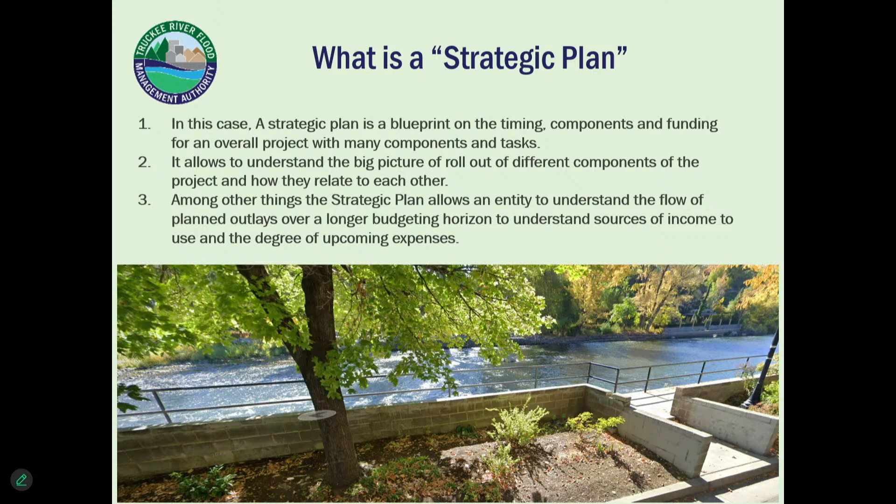Next slide, please. Okay, so why a strategic plan -- I just got ahead of myself and explained that, so I won't repeat it. This whole slideshow will be available on the internet, and I'll email it to you guys next week. Next slide, please, I already explained this.

Okay, so the components. One thing is you want to have a functional description of the project -- what are all the elements of the project and how they interrelate with each other. You also want a real good description of the cost of the project.

And what's interesting is as we do Rock McCarran and initiate these other designs, we'll get a lot better information on costs. Before, there's been all kinds of cost estimates out there. I've done a lot of designs where I've done engineering estimates myself, but it's much better to lay it all out and have an engineering firm say, yeah, this is what I think the cost is, versus me doing a unit analysis and guessing, so to speak.

So the third thing is the effects of the project, positive and negative, and how they are mitigated if negative -- it needs a section on that. It also needs a timeline and sequencing of the project along with the financing and logistical concerns.

Like, for instance, we always talk about with Vista -- I'm just going to ask, what is the critical path of Vista Narrows? Let's see if you guys know. Exactly, the permit is critical path. We have now the financing. Yeah, Alexis studied last night.

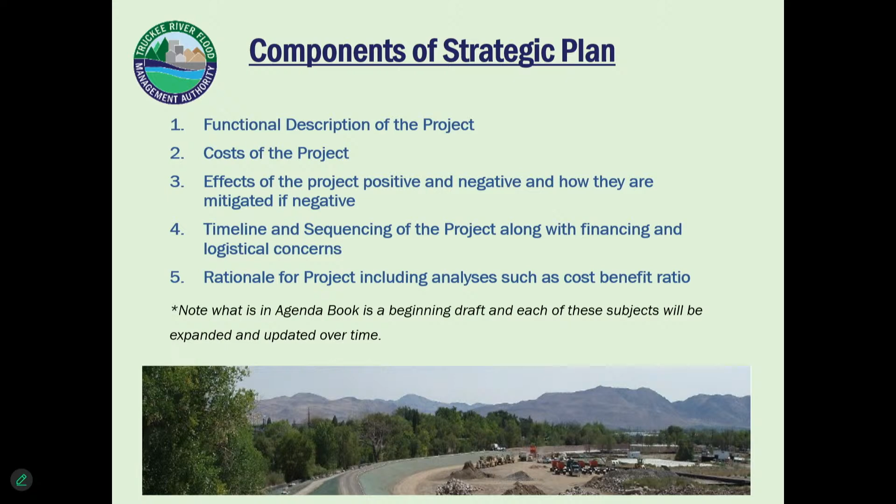That is a small project up near Lake Street, because there's some nuisance flooding that comes off there and gets down to the airport. It goes through all kinds of neighborhoods - not really bad flooding, but a nuisance flooding issue. At the airport it could actually do a little bit of damage. Then there's another project where we're causing a water level rise on the university lands. But if we put a small levee, or berm, downstream of McCarran Bridge for about 700 feet or so, we don't have that water level rise. So those two things are probably going to have to be added. They're not big, but they probably need to be added. As we get better modeling, better information, better terrain, we're going to see things we didn't see before - those are two of those. Next slide, please.

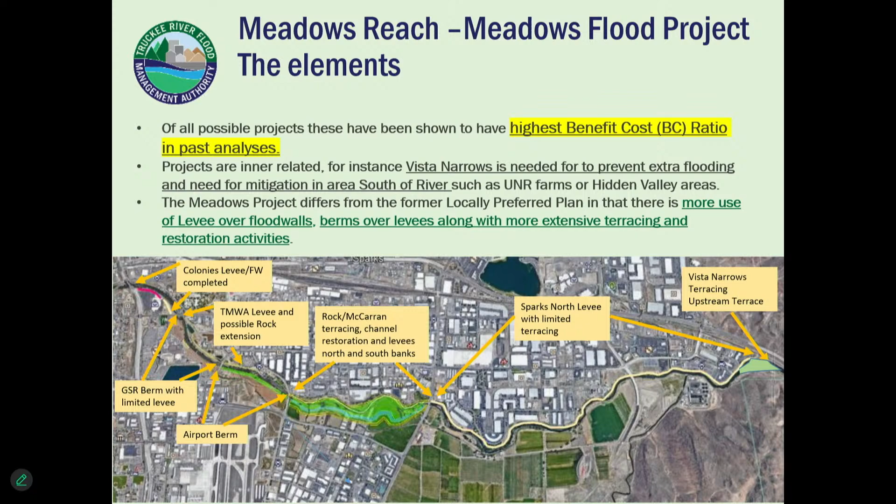Yes, sorry, George - where on Lake Street? Right at the river on the south bank, it appears water's coming into Lake Street, then it flows through that neighborhood, then it goes all the way down, crosses over at Vassar and gets into the airport area. So for such a little break, it really causes a mess. It probably wouldn't take much to fix - like a rolling hump or a low berm or something - but I don't have a design for that yet, and it's not on that map. No, it's not, and neither is the thing with the university - that's not on the map either.

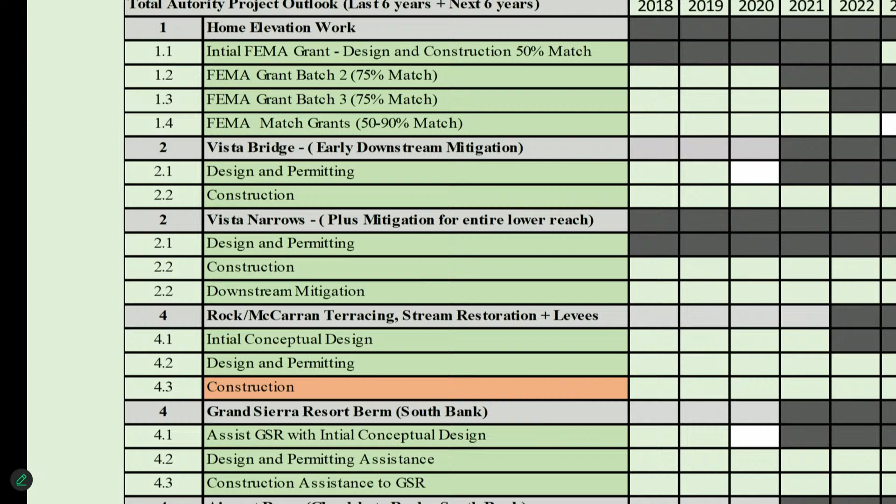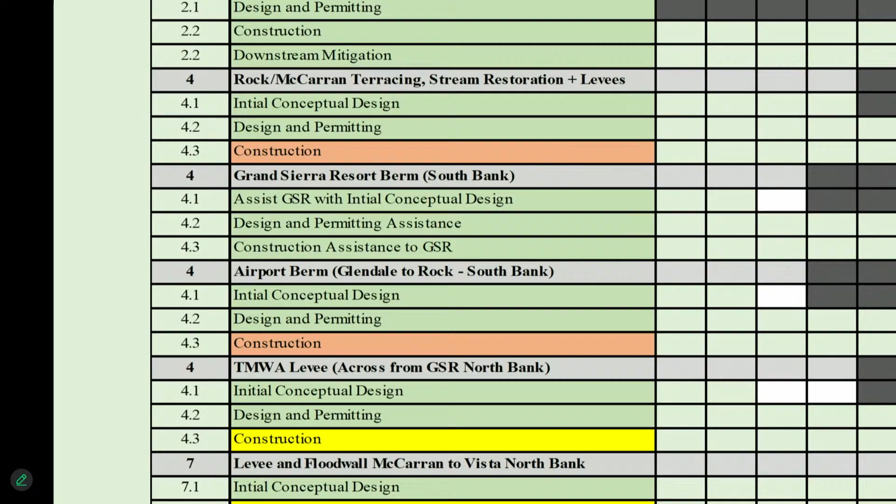So this thing, I know you can't read it - there's a copy of this slide in the slideshow being put up. But what I want to say about this slide is it's really important because it can give somebody overseeing someone like me an idea of where things really are at. If you go through there, you see the green - when something's in green, there's a footnote down there, meaning we have funding to do this right now. Like with our home elevation work, we've been doing this for a while, 6 years before and 6 years after, from 2018 to 2030. We've been doing this for a while and we do have funding for it. We'll likely only do 1 or 2 more homes at most, because there's just not a lot of interest in it. But then you look at all the things in green - those are things we can do with existing funding. With yellow, those are things we probably will have to, or might be able to get there with our income stream by the time it comes up. And the things in orange are things we will have to do some sort of financing or a grant for.

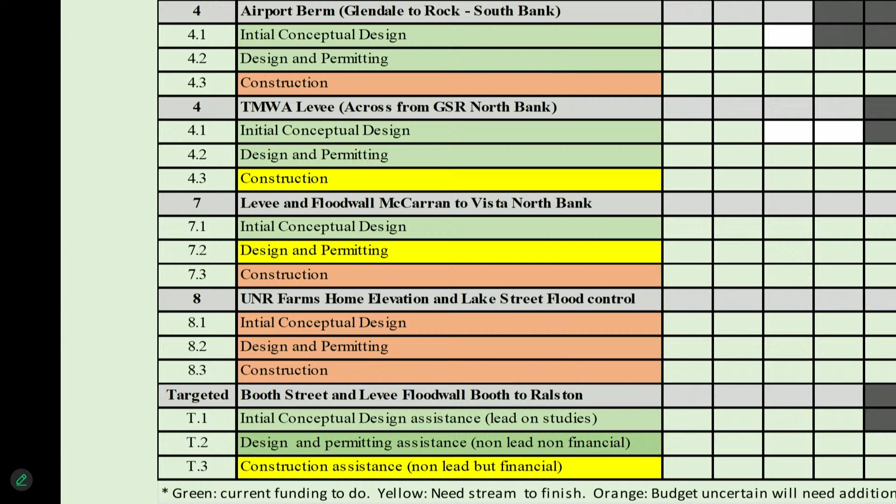Along those lines, one of the holes I saw as I was doing the plan is I really need to lay out our financing. I had a meeting with the head of a loan program that was just shifted to the Corps from EPA for levees. They are loaning out over billions of dollars to different entities, about 200 million at a time. The minimum is 20 million, and it's for things just like what this is.

We were talking, and he was really excited to hear that I was being deauthorized in a few weeks. At that time, it was at the end of October. So about a 20 to 30-minute talk, but the bottom line is, over bonding on $100 million, according to the averages, you save about $25 million with this program. So it's significantly different than bonding.

We're working on that, and as we get more information, we'll have a dedicated financing section that talks about both that loan program and grants. One of the other cool things about that loan program, and I do have a presentation in the announcements about when I talked to him after the presentation, is it is like... how many of you guys actually have a home equity loan on your house?

Anybody ever do that? Yeah. Well, a home equity loan is like, you can borrow the money and you don't pay interest on that money until you draw it. This loan program is the same way. You do not pay interest on it until you borrow it. There's a period where you're just drawing on the money and paying interest, and then they have a period where you pay it back. So it has up to a 30-year payback period, and you could have up to a 5 to 10-year draw period. That allows you to build the project and then put it into your budget for payback.

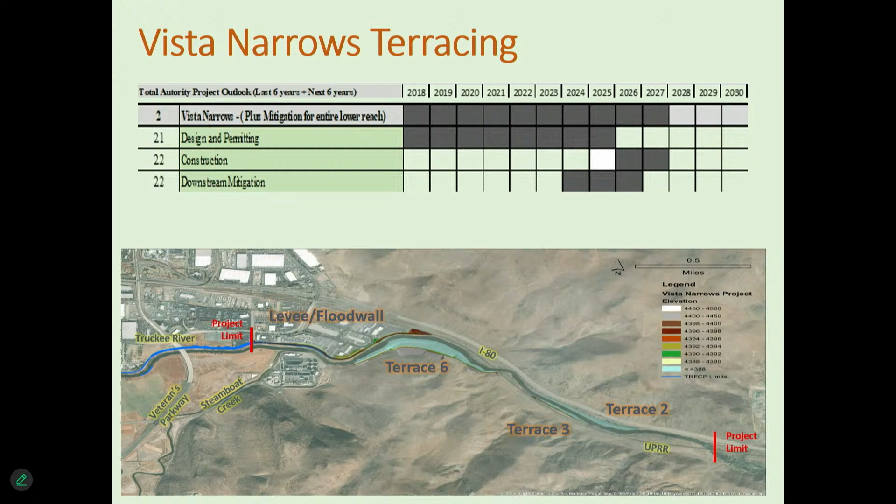Next slide, please. So the next thing, it's moved up now, is Vista Narrows. And that's part of this. When you have more information and modeling, you find out that if you cut off all those breakouts up by the airport and up by GSR, it's going to make a gigantic mess if you have all that extra water in the river and you don't have protection down there. So it needs to be done either concurrently or before, or very soon, maybe just right on the tails or something like that.

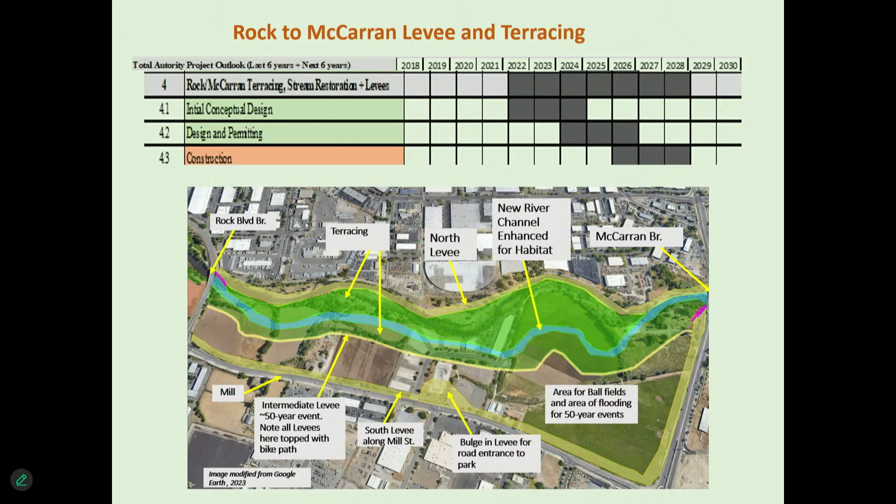So the idea is this is moving up. I have it starting as early as 2026. The 60% design should be done at the end of 2025. We're hoping to get a community grant for around $3.5 to $4 million. When we get that, we'll work on property acquisition. When we have that all in place, maybe as early as late 2026, we could do it. It'll probably be more like '27, but that helps us because now we're not behind these other projects like GSR, TMWA, and the airport. Next slide, please.

So the GSR berm with the TMWA levee. The GSR is an interesting subject, and we are... whatever to talk about them, right? Yes, okay, in general terms.

We are working very closely with the GSR, but their plans are shifting and changing themselves. So we are trying to work with them, with their plans, however they're going to do it. And it probably won't look like what's up on that picture right now. But whatever it is, it's going to provide flood protection up to a 117-year event with 3 feet of freeboard, just like the rest of the project. It's beyond a 100-year event because, frankly, a 100-year event in 10 years may not be a 100-year event anymore. It might be a 50-year event, and we need a higher level of protection than what we have.

So anyways, we're going a little bit bigger, and even the Walmart area there with the Colonies levee is designed 117 plus 3 feet, so that was good on them. We're going to match that level of protection. So this one, if you look at it, we're trying to get everything done by 2027 now.

We've already been talking to GSR multiple times. I've talked to TMWA. We've been out there once with them, and I've been out there with consultants about 4 times. So we're ready to put that into design. Probably our next meeting, I might even ask you to put this into design. So as we build those out, those will have the protection there for GSR and a major protection to the airport. Next slide, please.

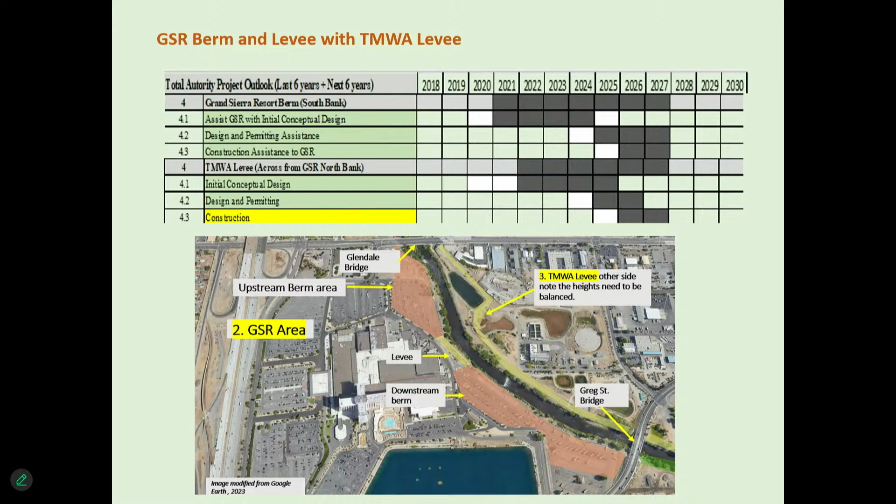So airport berm and terracing, this one, as you can see, we have been working on. One of them got cut off there, I'm sorry. I don't have the construction on there, but once again, the construction would be '26, '27. We've had 2 meetings with the airport, and we're moving, and these are in the last 6 to 8 months, so this isn't like over years. So we're meeting with them.

They want to meet with us more, and we are working forward on a design with them, and we're integrating them into the design team so they would help choose this contractor. They would look at all the different interim reports and make sure they're okay with it. So we're integrating them into it like we did with the tribe, like we've done with other entities. We're doing that with GSR, we're doing that with TMWA. Same thing.

So anyways, once again, we're looking at construction done by '27 on that. I'm sorry, I left that line out there.

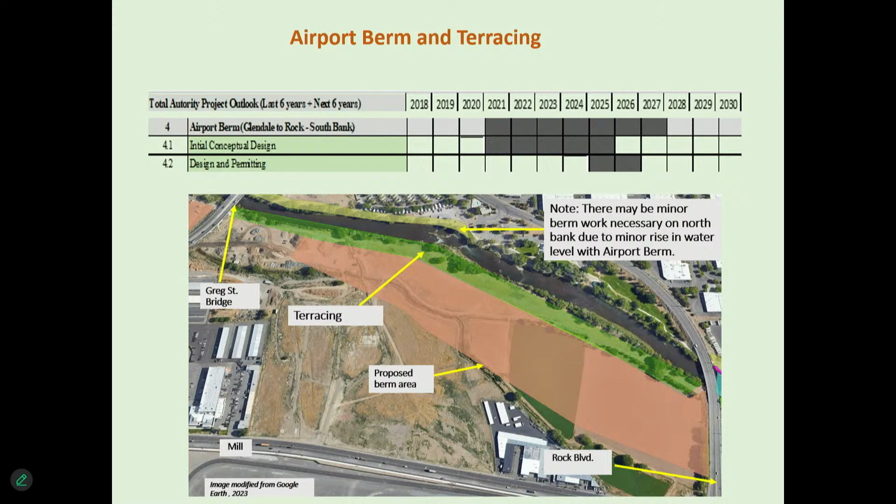Next slide, please. So this one is the North Bank levee, and this one is being moved up considerably. And I'd like to move it up more if I can. Right now I've got this in, and I should have put a blank in there for 2025. I would like to get into design and permitting, start our design this coming year. And what I'd like to do there is an alternative study to figure out how to place that and keep it as levee the whole way.

I've heard a lot from Sparks, both electeds and staff, that they want that to be a levee, not a flood wall. So we're going to work on trying different alternatives to get there and really study that out. Also, we want to look at whether we should break this thing up into 3 pieces instead of just one, and do it sooner, like the really bad spot where the breakout is, to protect the area more sooner.

So we'll be looking at that, and that's something we'll probably be bringing to you next year. I'm estimating we're going to bring all designs to you next year at some point. So, next slide.

Okay, so these are other things that we're doing that are related, or new things. Home elevation is still going on, and that will probably set to end at the end of 2026. We do have 2 active FEMA grants going right now, but we're just not getting a lot of interest. There is one homeowner we're working with off and on, so we'll see how that goes over the next 6 months or so. But anyways, we are working on it, though it seems there isn't a lot of interest in the program.

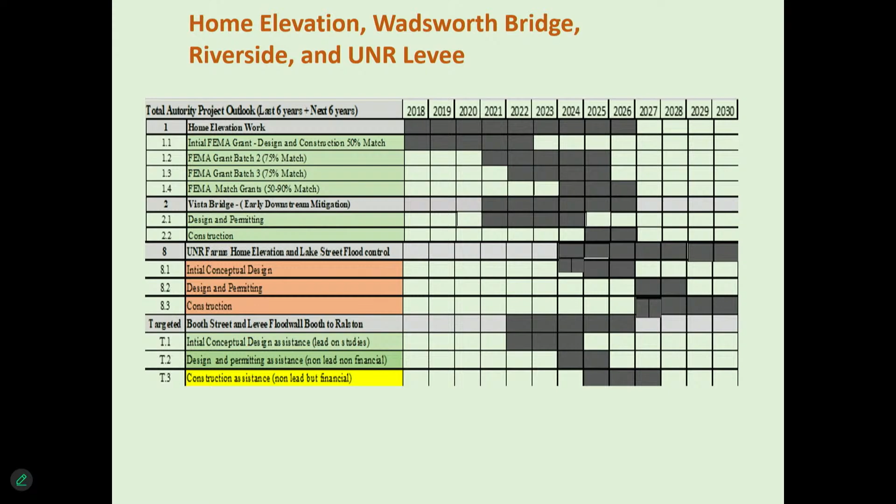So next thing is the cost of this has gone up, not surprising I suppose. You can look at all the different areas, but I've got Rock Boulevard to McCarran up to 59 million—some of my consultants scared me into making it higher than it used to be. The levee and flood wall at McCarran, I've put some more inflation and contingency on it, so it's up to 52.8. Vista Narrows, with more inflation on it, is at 51.5.

Some of those costs have already been realized, so this isn't just a theoretical cost forward. Like I said, I need to do a very careful analysis, a very careful financial section, but as of right now this is our cost forward, and it's about 20 million higher than the analysis I did last December.

So you see there, I was at minus 53 million. Now I'm at minus 73 million. That's something we can finance with that loan program if the interest rate isn't crazy—if it's around 4.5 to 5, we can do it; if it's 7 or 8 percent, no. Right now it is in that 4.5 to 5 range, and historically, when it was run by the EPA, it was even lower. So we have the ability right now to finance this and get it done in a very short amount of time.

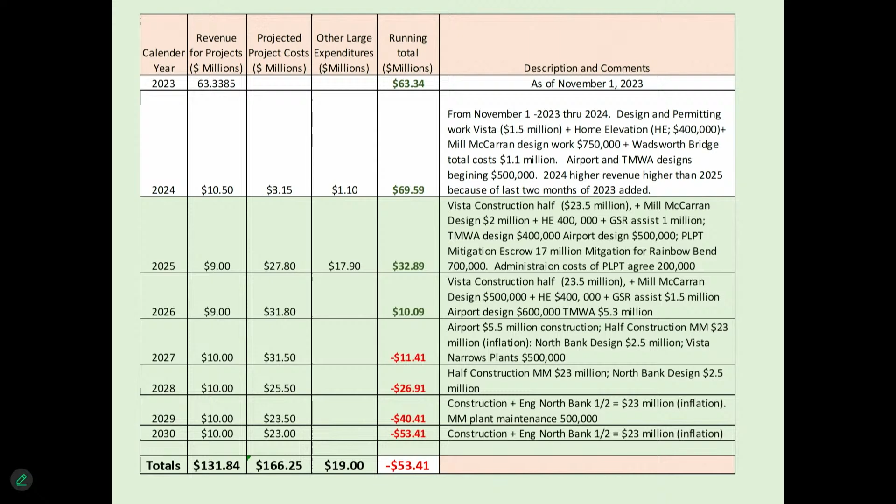Instead of having to string it out to get the funding each year. So, next slide please. The takeaways I got out of doing this exercise is that I need to update information on the cost and benefit.

Because I was just talking to Mayor Lawson, and we were talking about how I need to sell the problem. This is a $2.5 billion economic juggernaut staring us in the face that will crush us—not completely, but will really hurt us badly, on the order of COVID. I'm not saying as bad as COVID, but it's on the same order of magnitude if it happens. Like the '97 flood, if it happened today, it would really hurt us on tax base, damages, and people losing their jobs.

And these people who lose their jobs working in the industrial areas live all over the Truckee Meadows—a lot of them live in the North Valley. So people in the North Valley say, well, what does this have to do with me? Well, guess what, a lot of your people work in those areas and they'll be unemployed thanks to the flood. So I need to sell this, and I'm going to show a video here in a minute that helps do that, as well as other things.

And that's something you guys have been criticizing me about, by the way. And it's a valid criticism because I need to sell it. No, it's a constructive criticism. I take it as that, and that's okay.

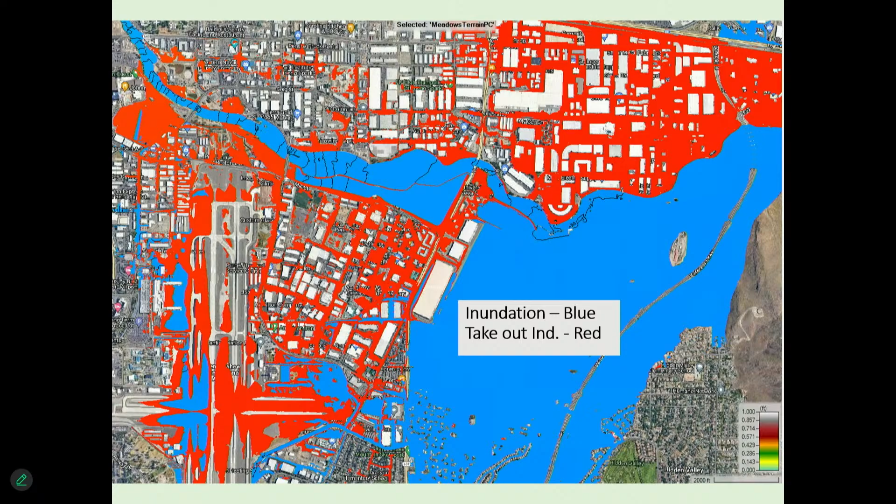Thank you, Mr. Chairman. Have we talked to our lobbyist about the new administration and realistically looking at what funding will look like, especially on the granting side?

I don't think that those will exist. And I'm just having a discussion about what that federal picture looks like for us. I just feel like this loan program looks robust. It doesn't necessarily look like it will go away. I just have some concern about looking into the future about funding for us.

Yeah, I think it will be more challenging for grants, but I think it might even be more liberal on the loan programs. And we have talked to him about it. And he even gave us a sheet on kind of thumbs up, thumbs down on different aspects of what we do based on if there was a sweep versus a divided government versus a Democratic sweep or Democratic divided government — this was actually before the election, and it had all scenarios.

So we have talked about this already, and we continue to talk about it. And we're going to be looking early and fast on the grants because some of this is leftover funding from the infrastructure bill. Yeah, okay, great.

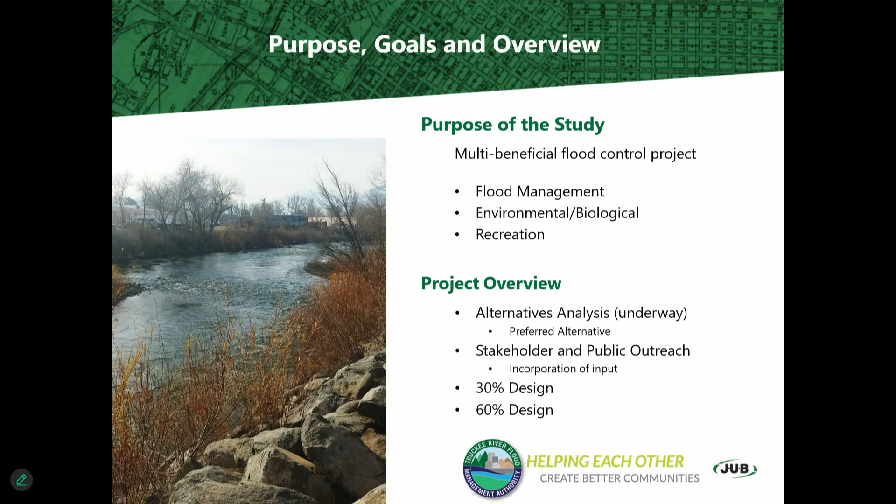TRFMA selects. All right, so the methodology on this - for all the alternatives we studied, the only ones we've put forward here all contain the 117-year flood. That is the flood that comes through the Colonies project right above the Rock McCarran project. So all alternatives do that.

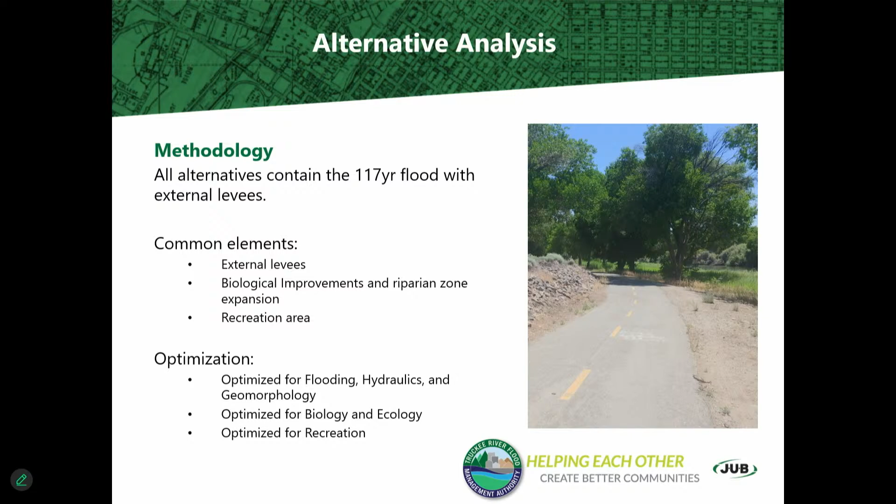Common elements in all the alternatives you're going to see today: they all have external levees, they all have biological improvements and riparian zone expansion, and they all have a recreation area. The way we optimized this, we essentially optimized first for flooding, hydraulics, and geomorphology. Once we got the flooding under control, then we'd go in and optimize for biology and ecology, and then recreation.

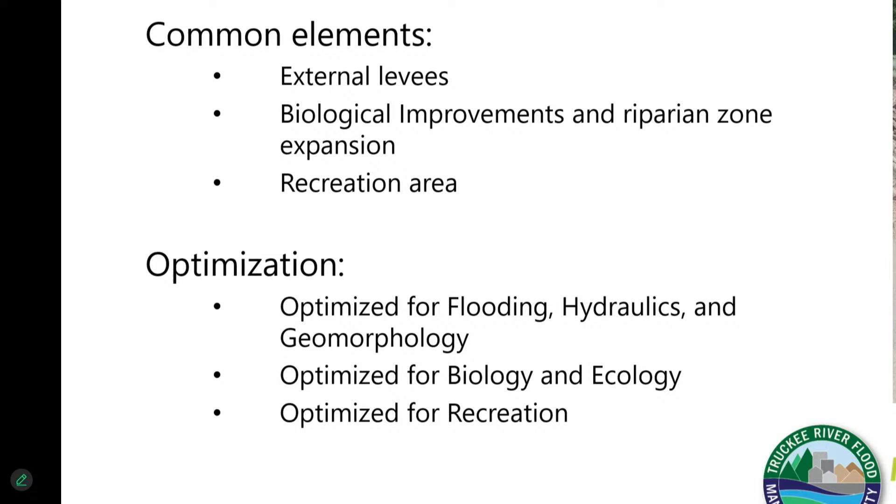Okay, so alternative considerations - we had a ton of things to look at, so many things. I'm not going to read the whole list, but the hydraulic considerations, geomorphology was a big deal, geotechnical, ecology and biology, permitting and land ownership, and recreation. All these subcategories are how we're ranking each of these alternatives. We're looking at each of these things for each alternative as we go through, and we're actually ranking them.

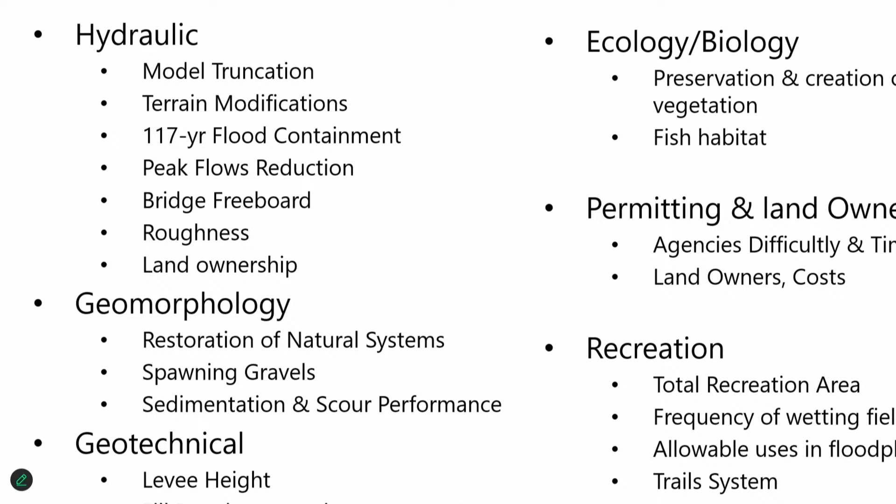What we're putting forward this month is a ranking matrix that's kind of like, okay, here's what we found, George - how do you want to weight this, and what do you think? We're going to work with TRFMA on the selection of the preferred alternative.

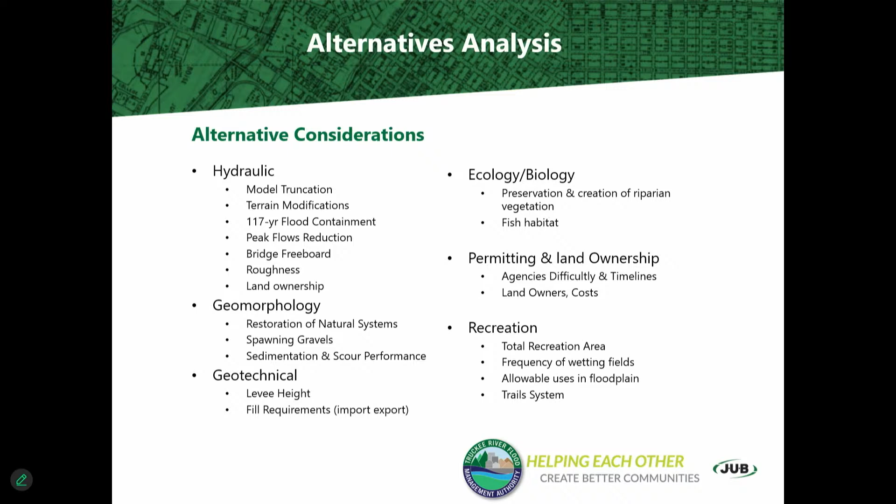Okay, so here's the proposed alternatives. Essentially there's a no action alternative, which is required under NEPA. Then we've got the no river alignment change with terracing - so that's really no change to the river alignment, but terracing. And then two river realignments.

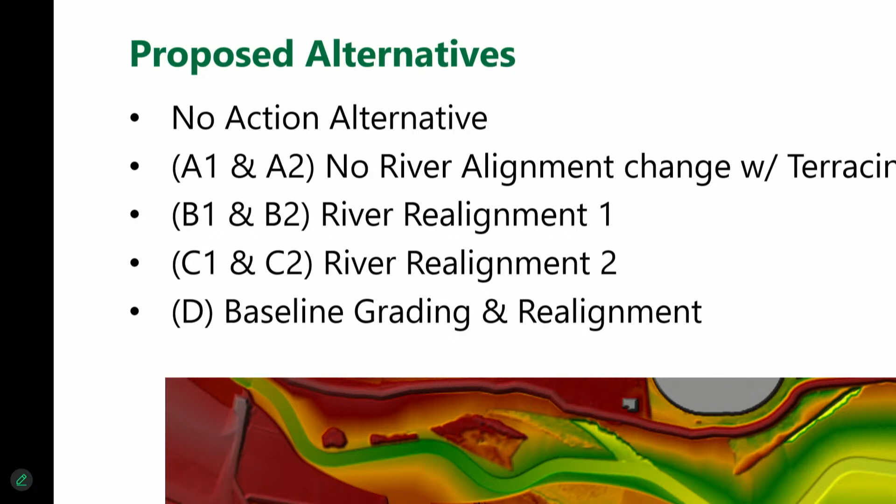And then D is a baseline grading realignment, which was kind of the proof of concept that TRFMA had done - it proved that we could do it, that George had done prior to us coming in. So that's also one of the alternatives we moved forward to compare.

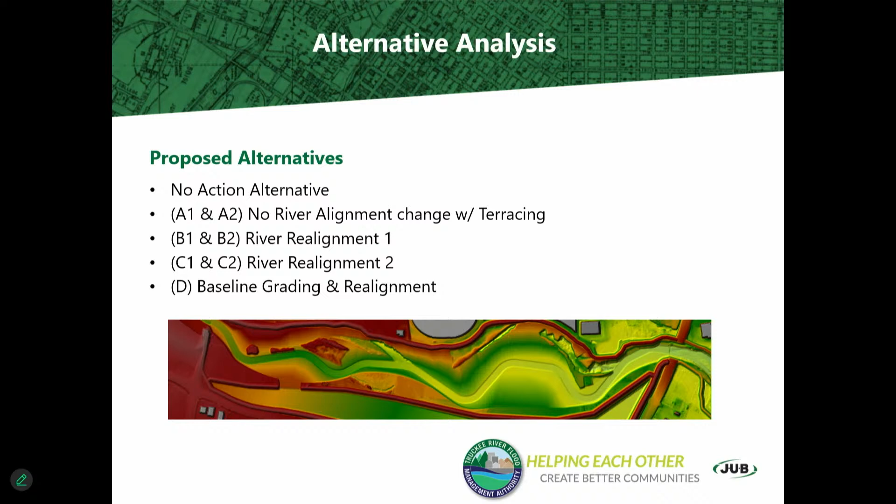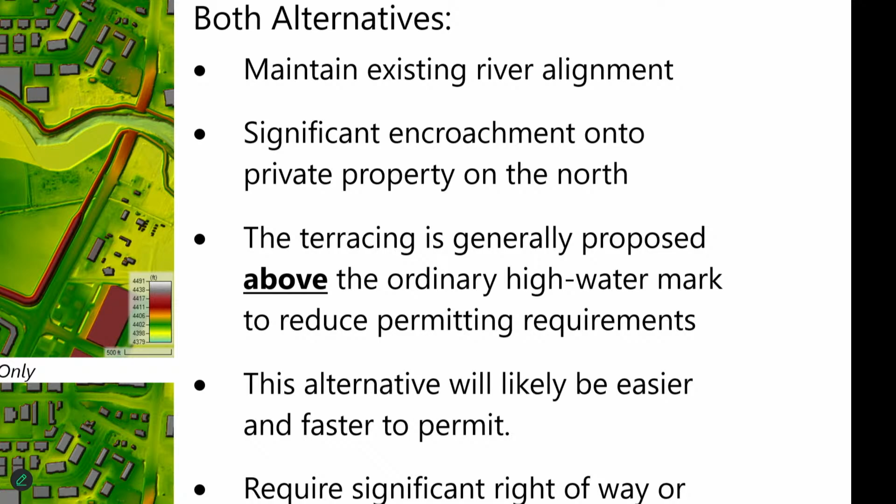All right, so here is the no river change alternative. Essentially this maintains the existing river alignment. There's significant encroachment onto private property on the north end of it. The terracing is generally above the ordinary high water mark. This alternative is going to be faster to permit, but it's going to require significant right-of-way or land acquisition, and it is not a full restoration of natural processes.

So if you go over to the image on top - I like how you're zooming in, thank you - so you can see the levee. I don't have a pointer. Anybody have a laser pointer?

Well, anyway, you can see that levee along the top on the north end of the river. In this alternative, that's pretty much across private property the whole way, and that's a downfall, a negative on this alternative. You can see all the terracing - essentially we go down to the ordinary high water mark, but not below, and we're grading above where Army Corps would have jurisdiction, so when it floods there's riparian area added, but it also makes it easier to permit on this alternative.

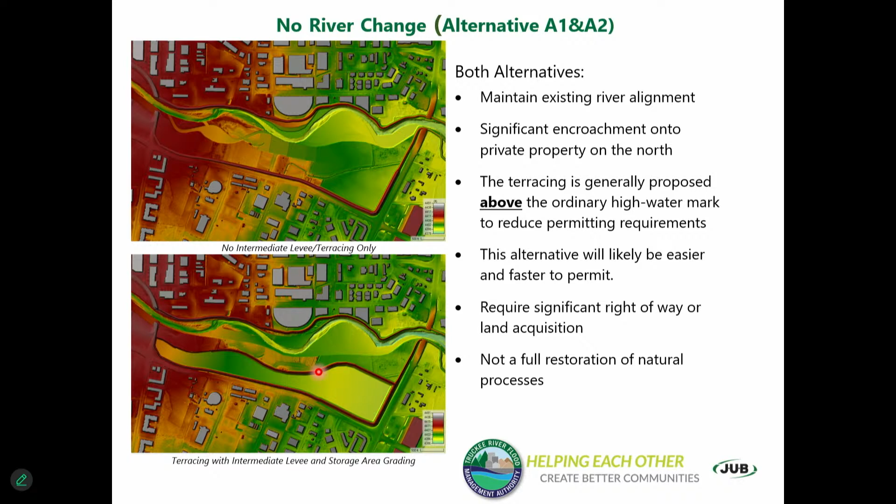And then the top and the bottom are essentially with a levee and without a levee. So if you go to the next slide, I'll talk about the with-levee and without-levee versions. Every alternative, we did one with an intermediate levee.

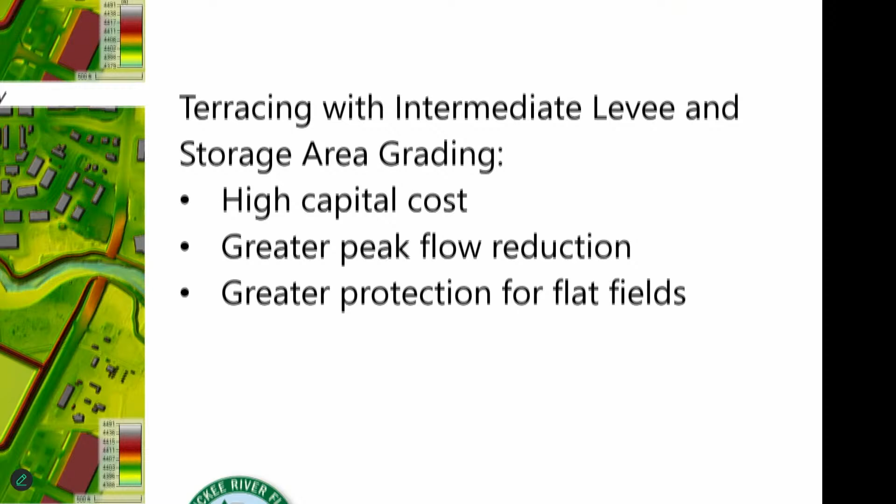So on the bottom, you see that intermediate levee with kind of a storage area, and on the top, it's just not there. We looked at all the alternatives with and without this intermediate levee. Essentially, if you have an intermediate levee, it costs more, but it also adds protection for the flat fields behind that levee.

And it actually reduces the overall peak. So if you have the storage area and the water flows into it with the levee, we take water off the peak. So you pay more, but you get more benefit in protecting the fields and taking water off the peak. There's a cost-benefit ratio that we have to work with there, and we're going to work with TRIFMA on whether the intermediate levee makes sense or not.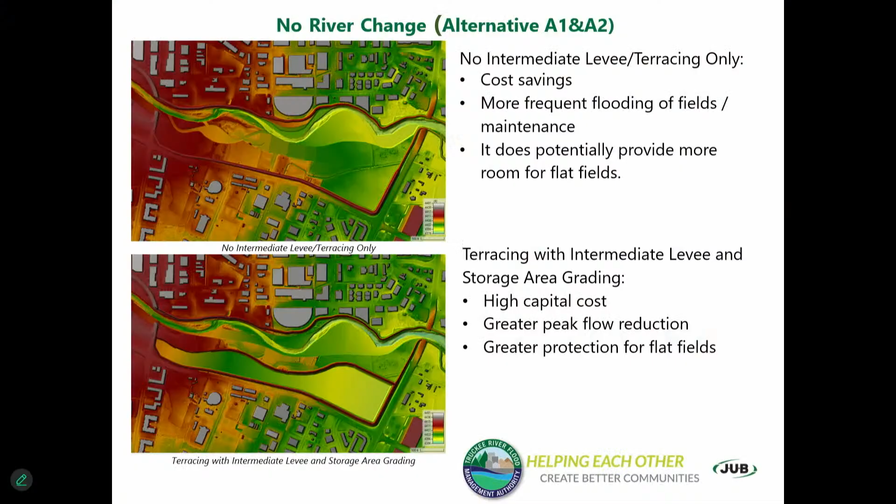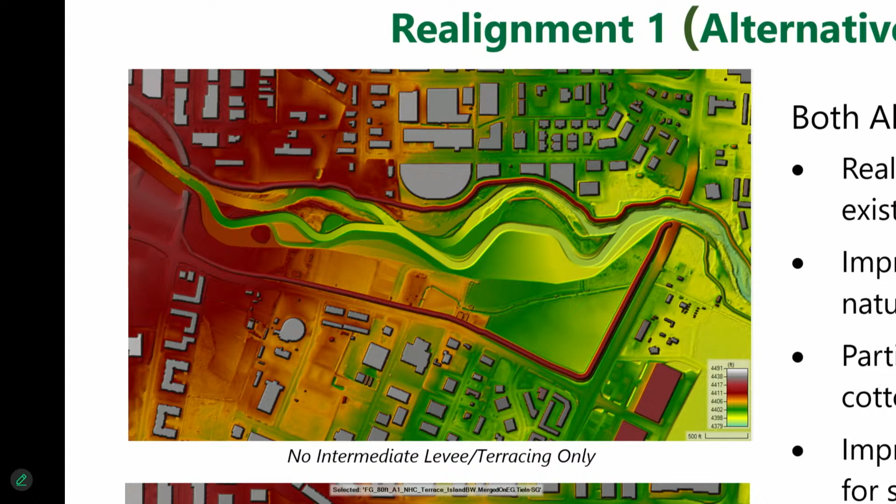All right, next alternative. So that's the no river change. Realignment 1 realigns the river. You can see it utilizes the existing channel. Above, you've got kind of that middle channel, the northern channel utilizes the existing river as part of the sinuosity. It also has backwater channels for habitat and fish. And then we terrace on the south.

And then this is the one with the levee. You can see different complexities here on the terracing that we went through. They can be applied in all sorts of different ways. We just chose a few as we looked at these alternatives. When we get into design, we'll nail those down.

The north levee on this generally does not encroach on private property. We're able to push it out of the private property, and that's a big thing for having to purchase or do right-of-way on the north. It has improved fish habitat. We're able to keep a cottonwood gallery, a very large cottonwood gallery with established trees in this alternative. And essentially the terracing there is low flow - in all these we took into account the flows below the 5-year storms where we're trying to wet the riparian zone on a regular basis so we can actually establish riparian vegetation and have habitat and make a beautiful restored river.

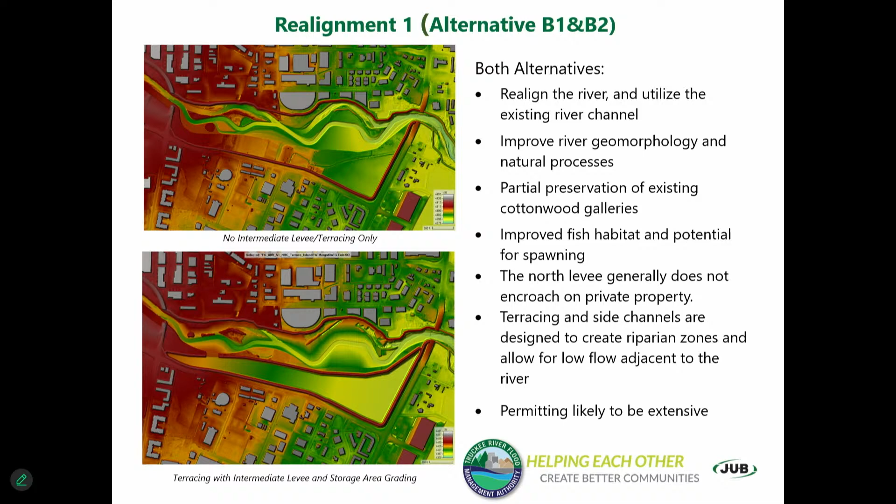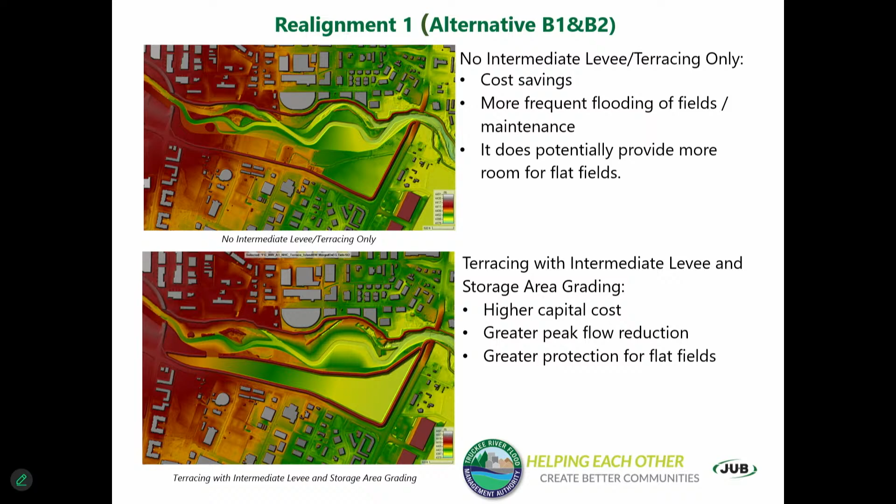Okay, next slide. Same thing with levee, with the intermediate levee, and without - it's the same benefits, same pros and cons. If you've got the levee, it costs more, but there's a little more protection. If you don't have it, it costs less. It's the same thing as the last one, we don't have to go through it, but I did include these slides for each of them. If there's any questions about that, let me know, with or without the levee - more protection, more cost.

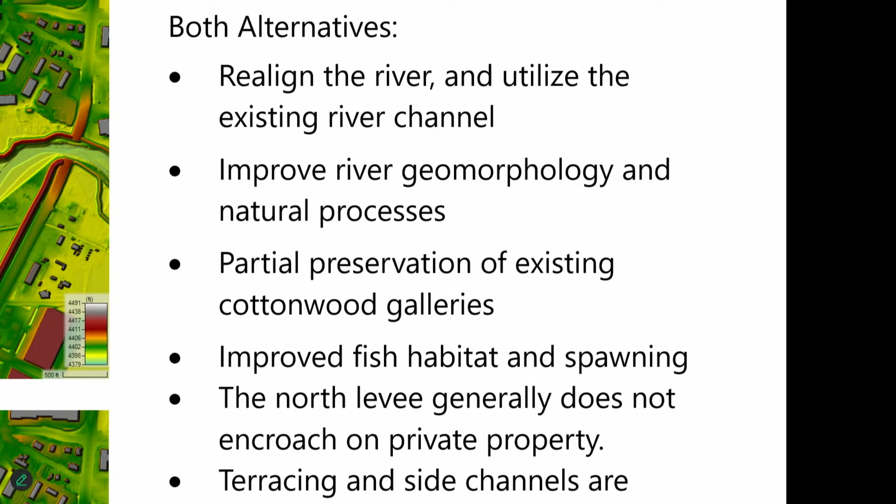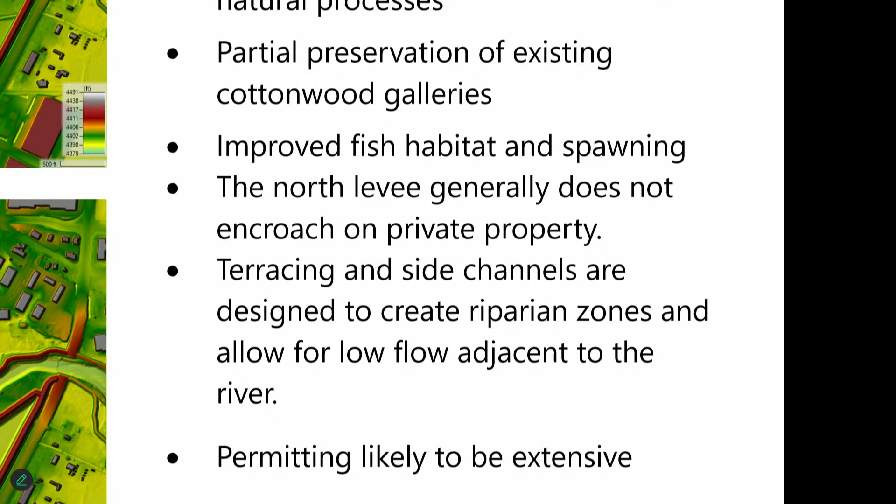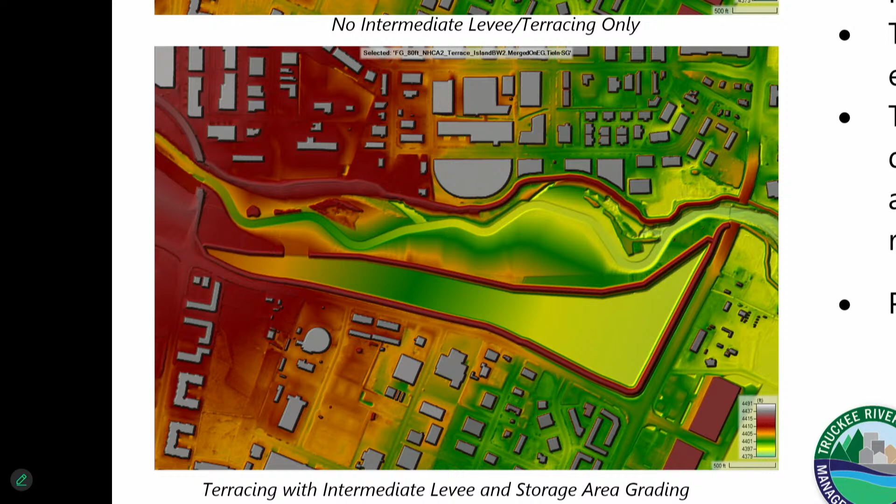All right, Realignment 2. This has very similar benefits to Realignment 1. It is able to utilize the existing river, which reduces overall earthwork. It improves the natural processes of the river. This one is able to preserve a major portion of the cottonwood galleries. It has better fish habitat, spawning, does not encroach on private property - all those same benefits as the other realignment, just a different geomorphology on this one as we look at how the sedimentation is happening and how the river lives and moves inside its corridor.

Maybe just focus in on the top one there for a second, so everyone can get an idea of how that terracing is going to work. As the flooding comes through, it's going to go over the terracing, like on a smaller storm, a 1-year, a 2-year storm. It's going to expand, go outside the banks, and be more of that living river, instead of being kind of an inside single channel. This will be a living river and create a riparian and habitat zone.

Everything to the south of the terracing is the recreation area. Essentially the whole south side we can use. We'll have to have parking and amenities, and the fields themselves.

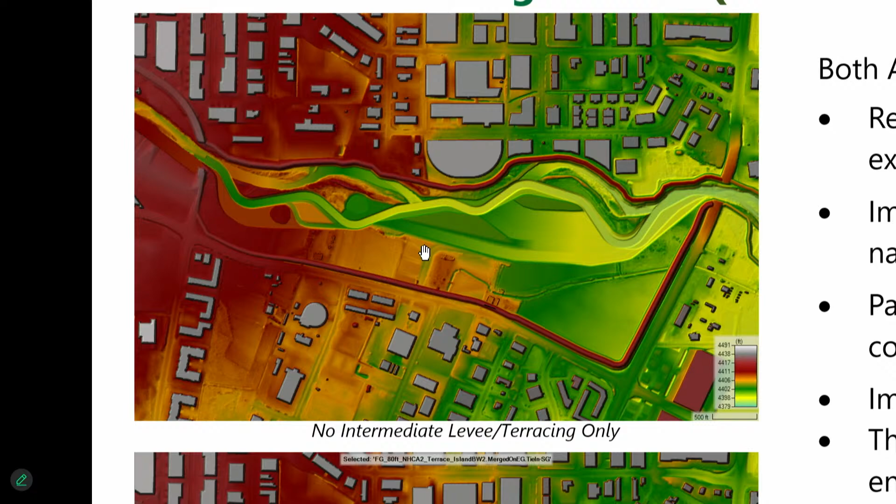So in this alternative, is this where the fish spawning and fish habitat works out? This does, yes. It restores the river in a meaningful way for fish. Mostly for the Lahontan cutthroat? Well, yes, that is the target species, but it'll be good for all fish, improving habitat for all fish.

Just from my standpoint, having a living, breathing ecosystem in an urban environment is pretty cool. So I think that alternative is my favorite by far.

Early on I've had talks with people like Mayor Schieve about this, and if they actually reintroduce the Lahontan cutthroat above Derby Dam, this could literally be the prime spawning zone, and it could actually be a tourist attraction because it'd be so cool.

A dinosaur fish spawning in an urban area? Yeah, and there was even a private donor, I can't disclose who it was, who wanted to fund a bridge to connect the two trails, the intermediate levee trail and the trail on the north levee. This isn't a game changer, but it does create a place where it's extremely rare to have that level of restoration so close to an urban center.

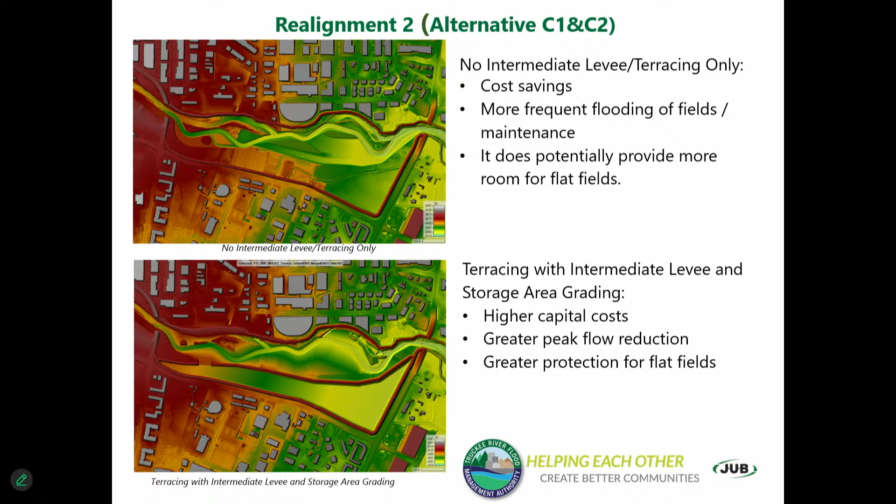And then the last alternative: this is the baseline grading. As I alluded to, this was the original modeling effort, a little different, more of a broad brush, but it gave us the baseline for comparison, not going over 2,400 CFS at Vista Narrows to not violate the agreement. That was our baseline comparison.

We did take it and optimize it a little, moving the levees off private property, optimizing the weir for storage and some other things. This will be put forward as an alternative just for comparison's sake.

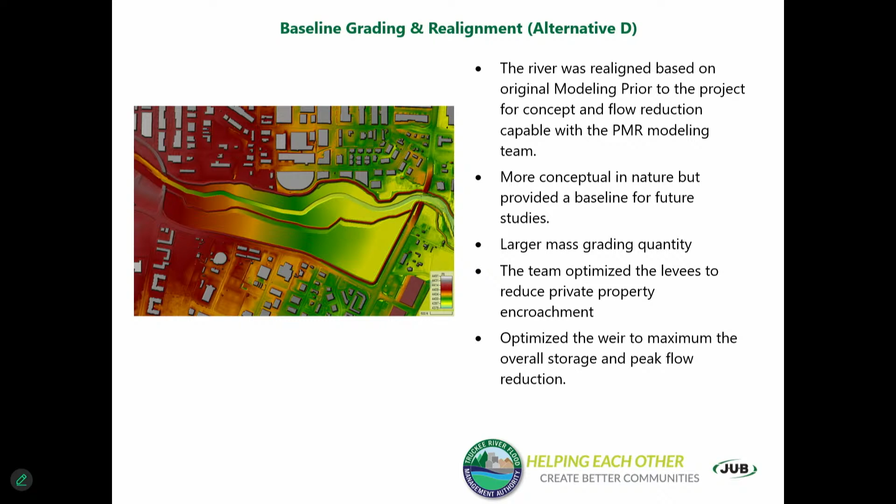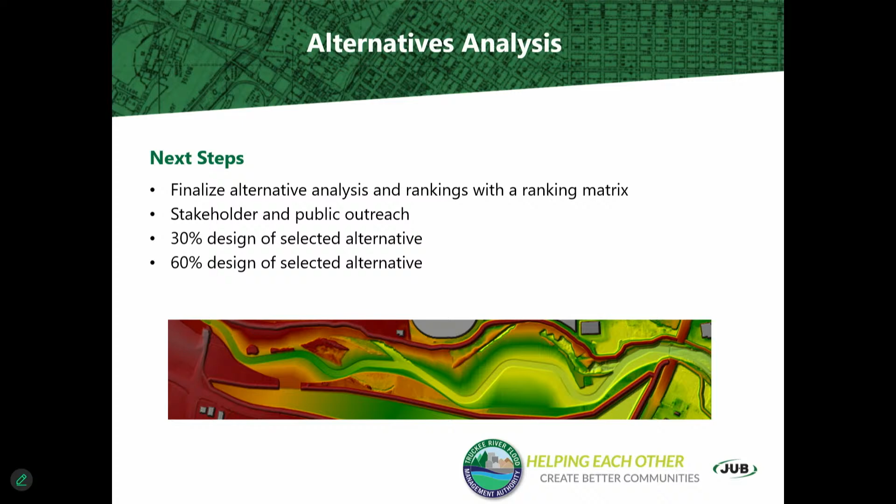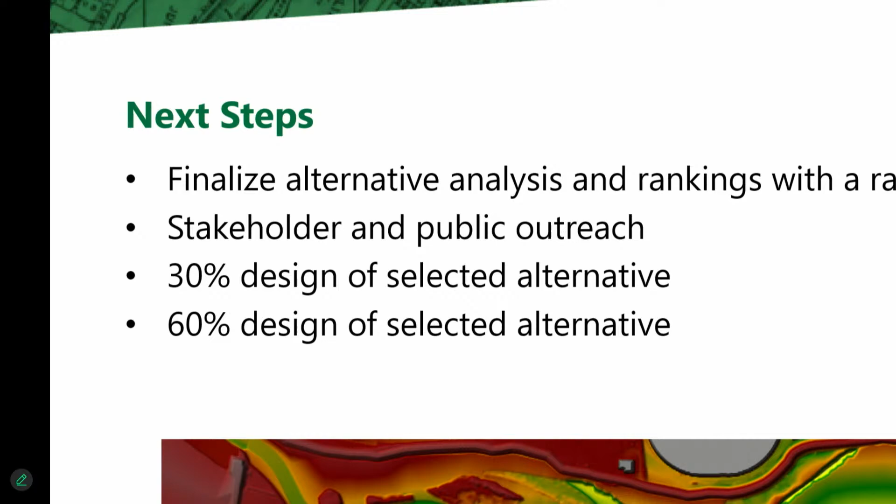Next slide. So next steps: we're really going to finalize the alternatives analysis this year. We think we'll have a draft to TRFMA by the end of this year. We'll go out for stakeholder and public outreach, and once we have that selected alternative, we'll go into the 30 and 60 percent designs. So that's where we are.

You guys have any questions? Any questions, comments? No public comment? Got you. Then I think we're good to go. I see no action, so we're moving on. Thank you, sir, appreciate it, great job.

TRFMA. Repeat after me, say it again. Just flood, say flood. I want to hear the mayor say that word.

Item 6. Presentation and update on the status of preliminary designs for levees and flood walls along Riverside Drive, from upstream of the Booth Street Bridge to Arlington Avenue.

Kayla Doughty from the Carson Truckee Water Conservancy District and JUB engineering staff.

Hello, good morning everyone. How are you? I'm assuming this is on. It's working. Yeah, green's on. Okay great, well let's keep the excitement and good times rolling.

We're excited to give you an update on the Riverside Drive project. We last saw your board back in March, and there's been a lot of great work since then. We wanted to give a quick update on what has occurred since that March board meeting, and a preview into what you might see early next year as a consent item. Last time we spent a lot of time on who Carson Truckee is and why we're here in front of you.

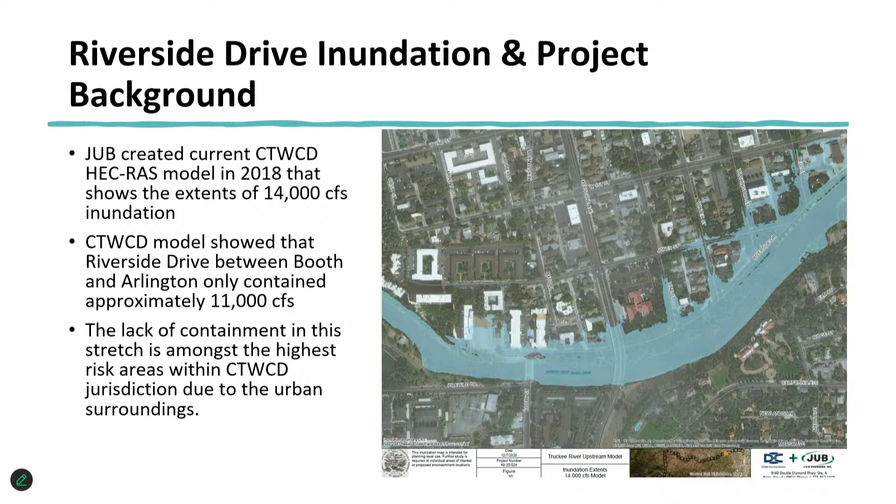Carson Truckee commissioned a fairly extensive HEC-RAS model in 2018 to model the entire 14,000 flow, and we noted that at that time it really only contained about 11,000 CFS—quite a bit lower than the original intent of the flood project. This is a concern for our regional area because it's one of the areas in Carson Truckee's jurisdiction that has the most risk in flooding times, because of how urban that area is.

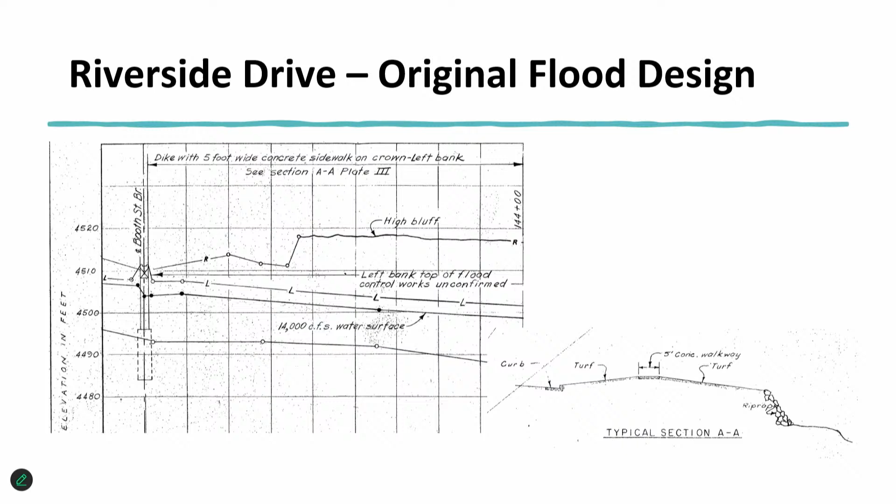We are showing you the 1950s era hand-drawn design that was included in the Martis Creek Agreement for this area. This is one of the few areas in Carson Truckee's jurisdiction that has what they consider a dike. Everybody has walked that beautiful section adjacent to the river—that 5-foot concrete walkway is actually called out in the plans. So it's essentially a dirt berm with a nice path along it.

Since we saw you guys last March, I want to point out this is a super exciting project for me. I've been with Carson Truckee since about 2020, but my predecessor, Lori Williams, general manager of TMWA prior, has been fighting this fight since about 2012. So we're on 12-ish years of trying to get this project done, and I think with the leadership at the City of Reno and TRFMA right now, we're finally there. It's very exciting—we've been collaborating very well.

JUB has been super instrumental in getting an alternatives analysis done, just like you heard from Shane in the prior presentation. These are very important—it's important for permitting, and more important, I think, for public outreach so the public can see it wasn't just one decision made to push a design forward. So they looked at 3 different scenarios. The first one is what we call Alternative A.

That's just containing the 14,000 CFS. I know you guys have experience with a design option for the full 100-year flow there on Riverside that included an astronomically large berm that the public absolutely lost their minds about, but we thought we'd give it a relook anyway, just for fun.

Then we did what is considered an intermediate flow event. We weren't targeting any specific flow for our Alternative B. Instead, we were taking an existing wall down in the Arlington area and just extending it—that's about a 2.5-foot tall wall. We wanted to see what that would do and also whether that's one we should be considering for that stretch of design.

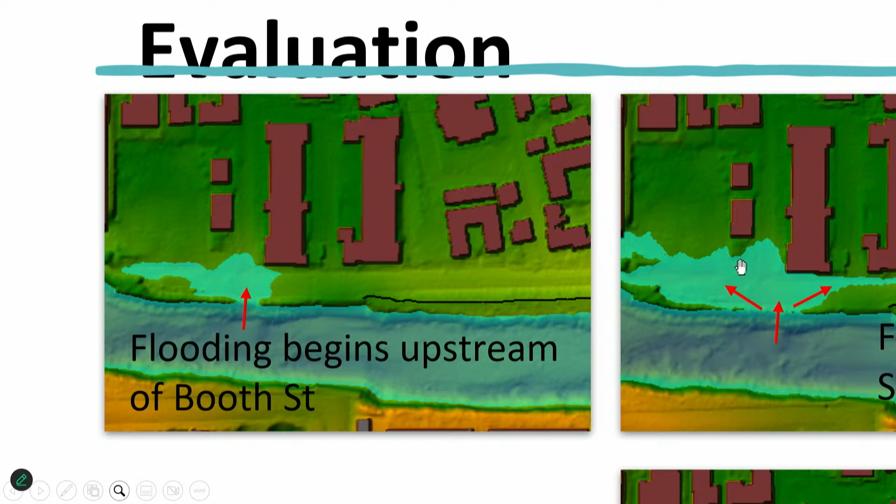So next slide please, here we can talk more about the source of the flooding. In the photo on the upper left, we see just upstream of Booth Street on the Truckee River. This is the earliest time increment in the model we're using, and we can see flooding begins to escape the river channel at that location. To the right, we see flooding then continues down Riverside Drive, and that's the source of most of the flooding in that area during the 14,000 CFS flood.

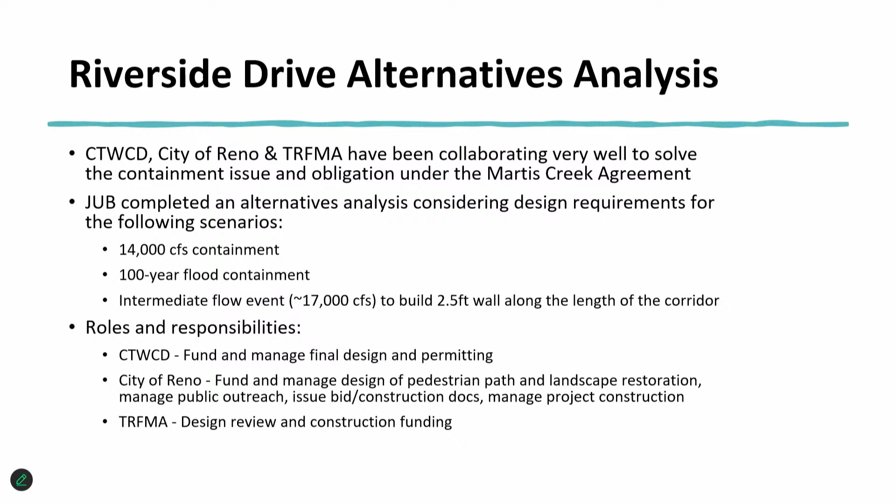On the bottom right, we indicate with those red arrows that there is some flooding that does occur according to our models, sourced directly from the berm overtopping and not the flood wall. So the flood wall is the majority; there is some minor flooding that occurs along the berm.

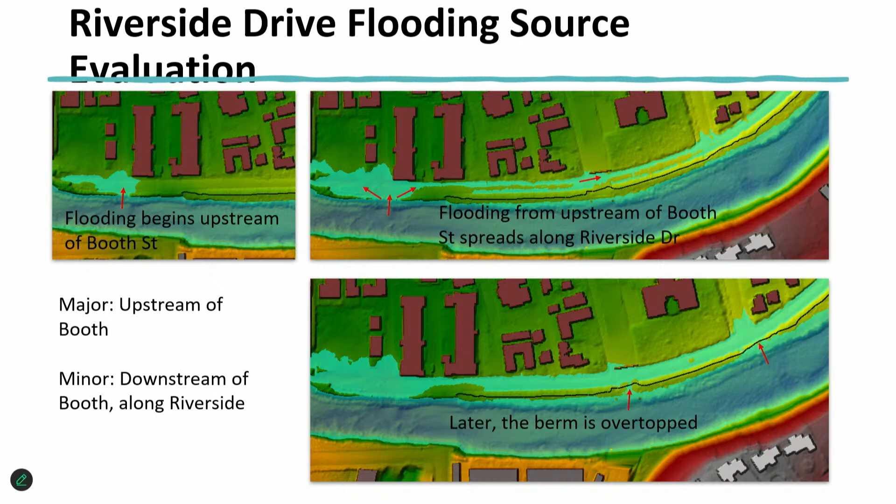Next please, so here's an overview of the extents of the preliminarily designed flood wall. It's the same general location, you can see Booth Street Bridge on the right. As Kayla mentioned, it's about 400 linear feet of flood wall with an estimated maximum height of about 7 feet from the top of footing to the top of wall.

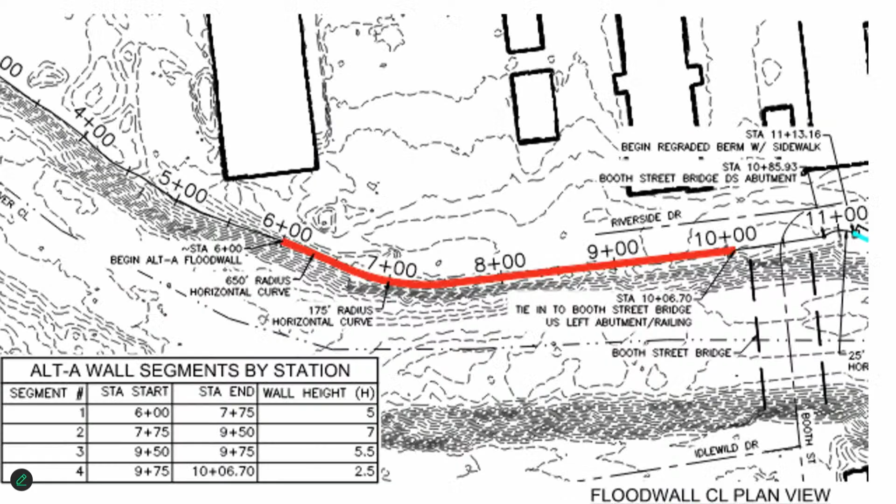Just downstream, in the next slide, we can see the approximate extents of the berm portion. This is about 1,700 feet long, and it is coincident with the existing path. Next, please.

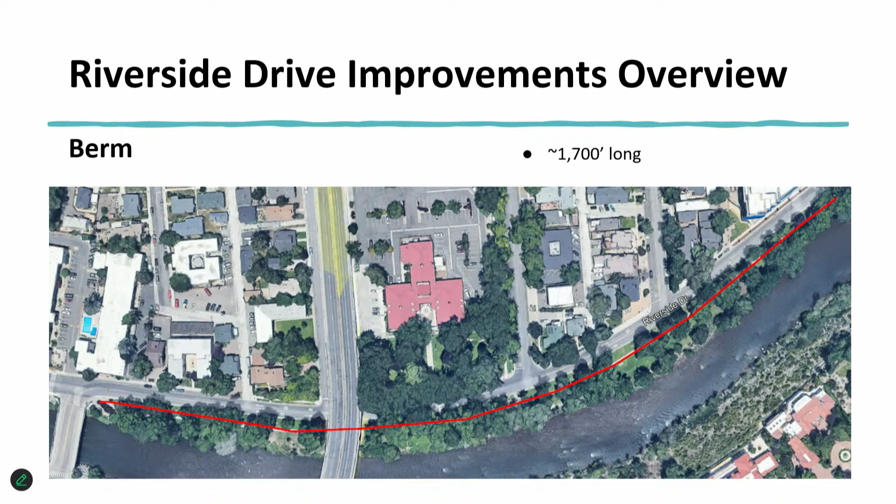So we've begun the 30% design process directly with CTWCD, and the primary design objective is to contain the 14,000 CFS flow rate. In order to be within the bounds of the maintenance agreement, we intend to replace only with like-kind features. The real design constraint is avoiding, reducing, and mitigating impacts to trees, since that's such a beautiful amenity there, which makes grading and construction improvements challenging.

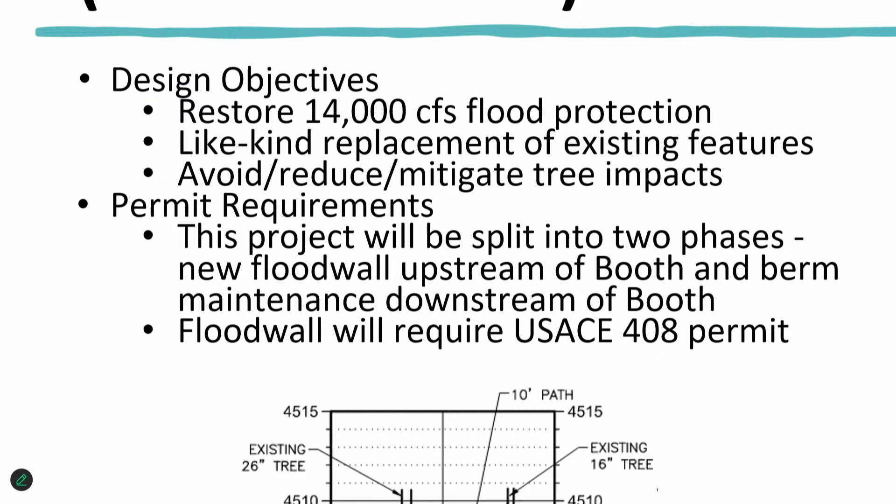So reiterating what Kayla said, we intend to split this into two phases, the flood wall portion and the berm portion. If you zoom out and pan to section C1, you can see this very preliminary section we've cut that shows the challenge of centering new improvements on the existing path and dodging trees. So we've spoken with City of Reno staff, the arborist and urban forester, to determine their expertise and recent experience on projects like this, so we can work together as the design progresses.

Is this existing, what you're showing us? Sorry, yeah, the dashed line is an approximation of the existing terrain that we've surveyed, and the bold line is a very rough placement of an alignment of new grading.

So this is intended to show a very constrained section of the path. And you take out that tree? Potentially, at this stage yes, the assumptions in this design iteration would require removal of that tree, most likely.

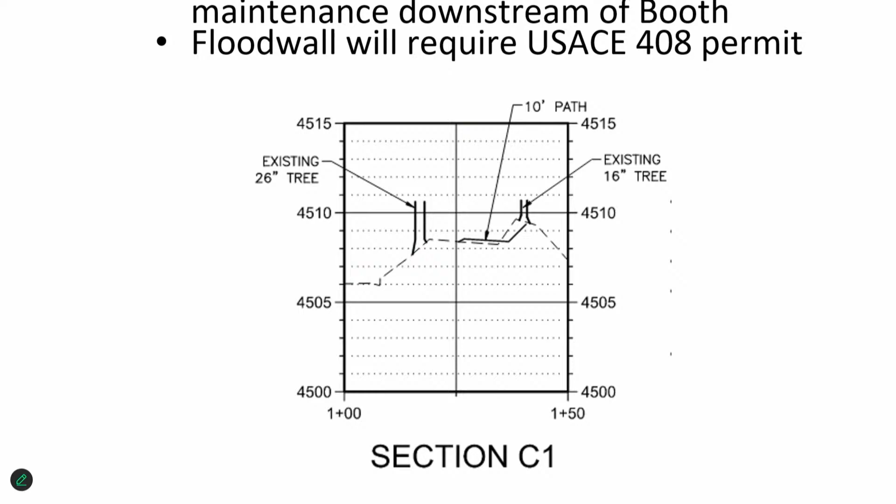So if you zoom back out, you can see a plan view. The red line indicates the preliminary grading limits. The green is the existing path, and the black is the proposed path.

The major design parameters we can vary are the path width. We'd like to bring that up to City of Reno standards, potentially a 10-foot wide path, but our initial design iterations have shown that may not be feasible.

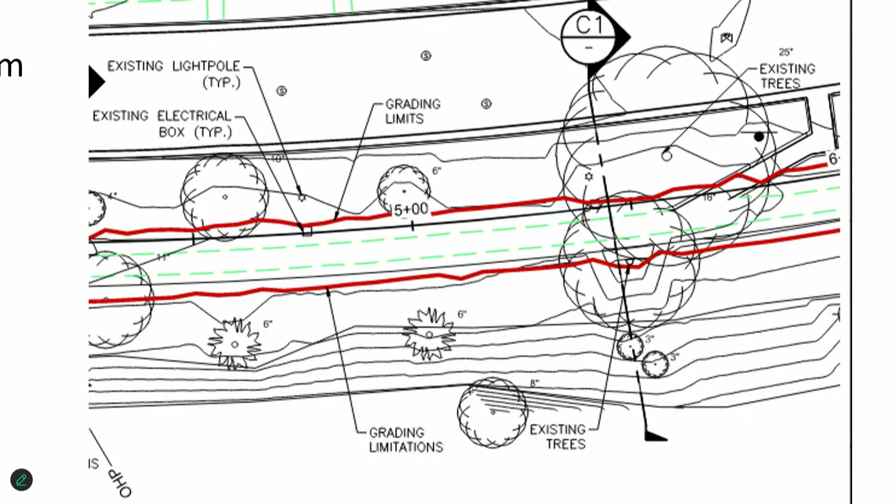Similarly, we'd like to have 1 foot of freeboard as a minimum on the existing berm. That's achievable without additional elevation in some locations, but as we saw in the initial figures showing the flood sources, we're below that containment level, so there will have to be some increase. We may be able to get it to a 0-foot freeboard, exact containment of the flow with no wiggle room on top. Again, not desirable, but it's a balance of mitigating existing features and mitigating risk.

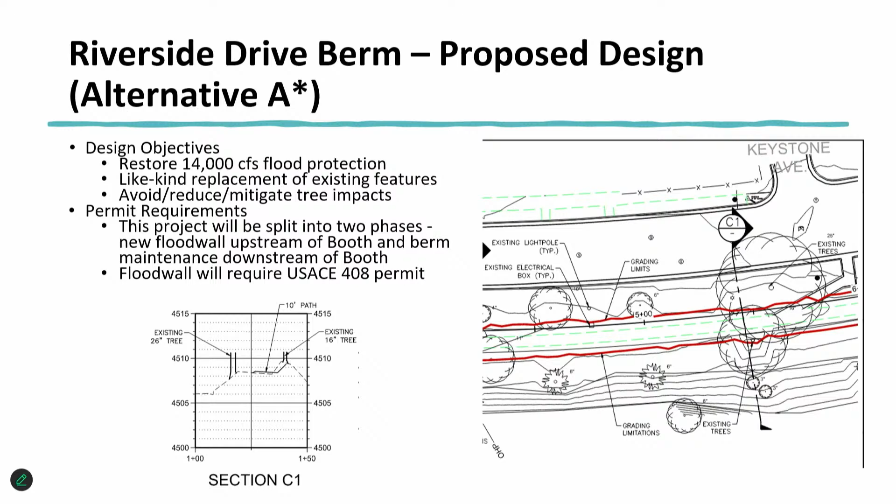Did you look at going into Riverside Drive? Not in this phase of analysis. That was discussed with CTWCD and TRFMA staff, and it was desired not to encroach in our design process. Why?

I think the biggest reason is - George, do you remember what year it was looked at for Riverside to do the full 100-year flood, and then it was that big berm that took over half the road? Yeah, that was in 2013.

That's about $20 million. It's very expensive, but also it had some really sensitive public pushback. I think at that time they were looking at creating a berm large enough that it would take an entire lane and make Riverside one-way only. There was such negative feedback on that, we didn't want to go back to that design alternative. It's not used a lot, and it's heavily used by bicycles - that road is part of a grid, so it's not necessary to have vehicle traffic on it.

So just as a board member, my 2 cents, living in the City of Reno but certainly representing Washoe County, trying to be sensitive to my City of Reno counterparts - I'm not saying I want to spend $20 million, because I don't think you're even looking at something to that extent, that 100-year flood piece George brought up, but I'd be open to looking at that since you're at the 30%. That's my one board member's opinion.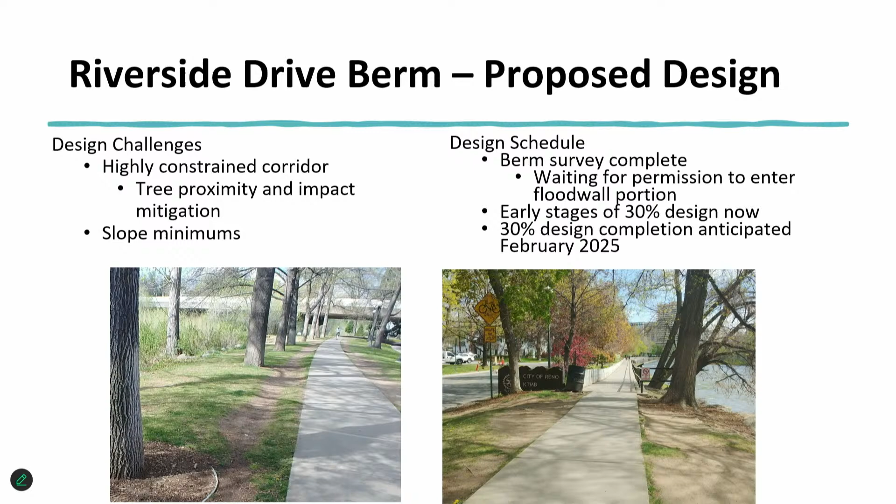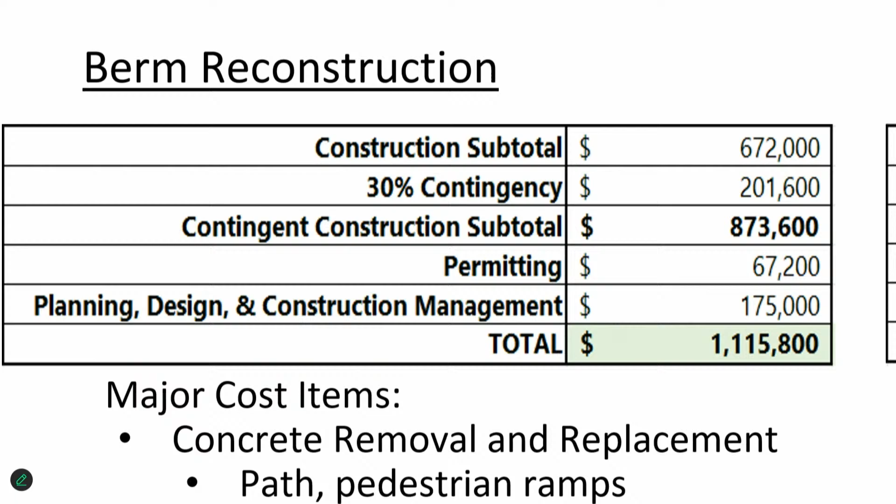Next, please. As for costs, here are what I'll call early 30% cost estimates. For the berm reconstruction, we're looking at an estimated $875,000. We expect permitting and additional planning, design, and construction management to bring that total to approximately $1.1 million. Here you can see the major cost items.

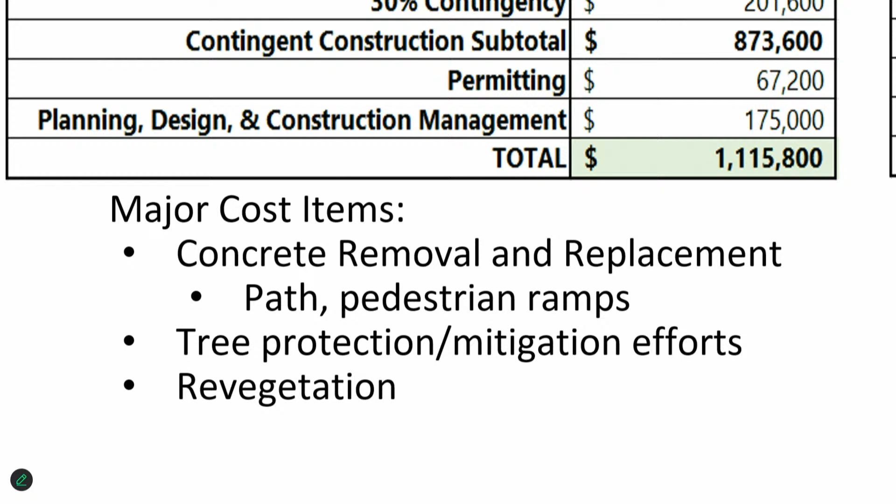Most of it is concrete removal and replacement. We expect that construction to be somewhat specialized, not just taking out, scarifying and recompacting. We'll have to do that more carefully with either pneumatic or hydraulic excavation to examine roots, determine which are critical, and remove them selectively.

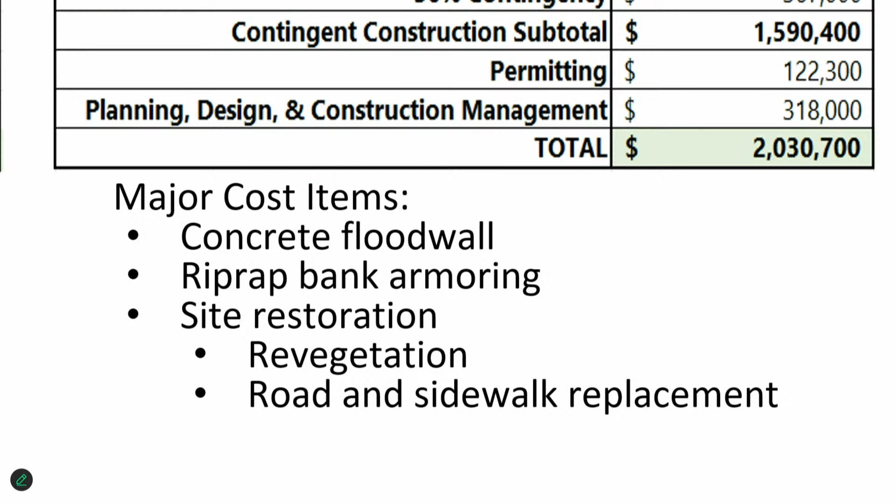As for the flood wall, here we see the costs are estimated in total as about $2 million. Major cost items are the flood wall itself and the fairly substantial riprap bank armoring that's present already. This portion of the project will disturb the existing roadway temporarily, we expect, but we expect to replace that in like kind.

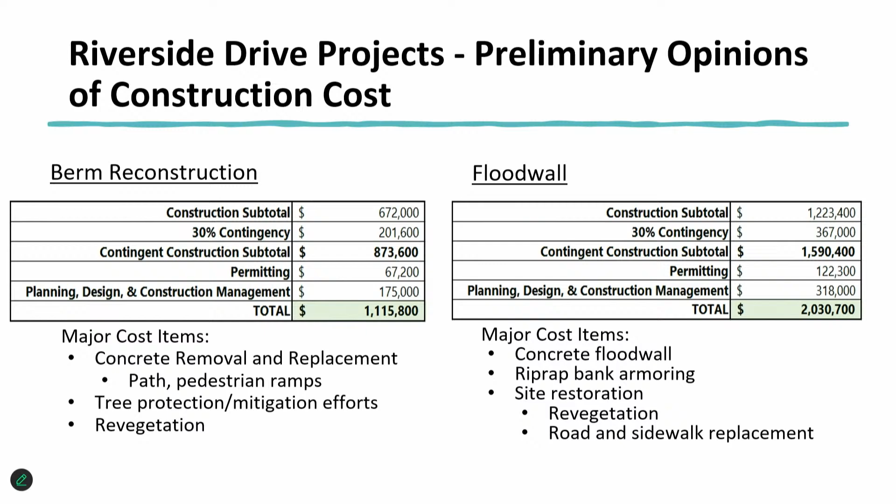Next, please. Happy to take questions if you have.

Yeah, and I'd love to go back to a little bit of discussion on the alternatives analysis. I think that we are happy to consider, so for Carson Truckee, we just want the 14,000 contained because that's our jurisdiction, right? And completely hear what you're saying as a member that lives and works in the city of Reno, and enjoys that area as well.

I'm wondering, based on George's involvement in the alternatives analysis and kind of working with the city of Reno, we talked about alternative C really becoming more of a transportation project, where it pulls in RTC. Are we looking at just modifying that to a one-way only street? Are we looking at adding a larger bike lane? I think that's really why we shied away from that alternative, because we wanted to focus on it being a flood project and not so much a transportation project.

But I'm curious if you guys would be interested in an item at the next meeting where we actually present that alternatives analysis and allow the board to vote on it.

Ms. Hill? Yes. Thank you. And Carrie has heard me talk about this, so I know this is not new. I'm not trying to stop the progress. It would be great if we could get something going this next year.

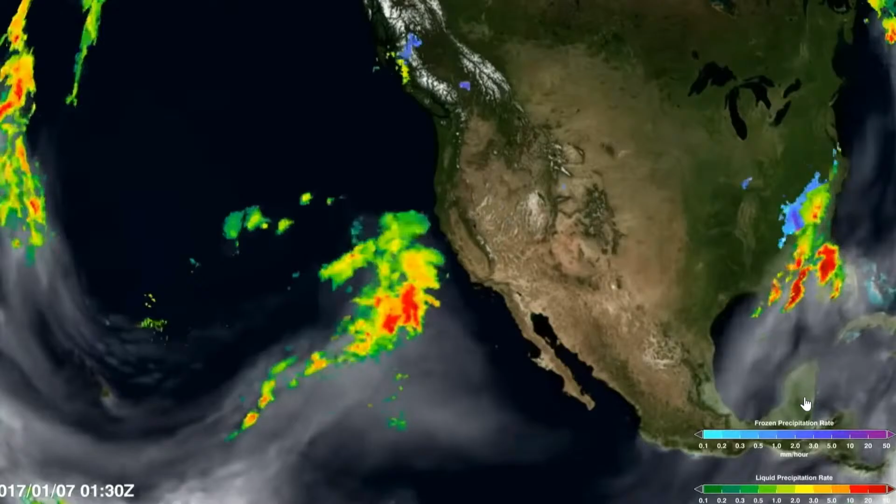The main types of conditions that have caused flood events are atmospheric rivers. Atmospheric rivers are basically a concentrated stream of water vapor, bringing energy from the tropics, tons of moisture, equivalent to multiple Mississippi rivers of volume. When they encounter mountainous terrain, such as the Sierra, that water is forced up, begins to condense into clouds, and unleashes a lot of rain and snow in the region. Most atmospheric rivers actually bring us between 30 and 50% of our total annual precipitation. It's those really strong events though that can bring us our problems, producing copious amounts of rain and snow, and also our flooding conditions.

The Truckee River has a history of flooding. There were floods in 1950 and 1955 that did considerable damage.

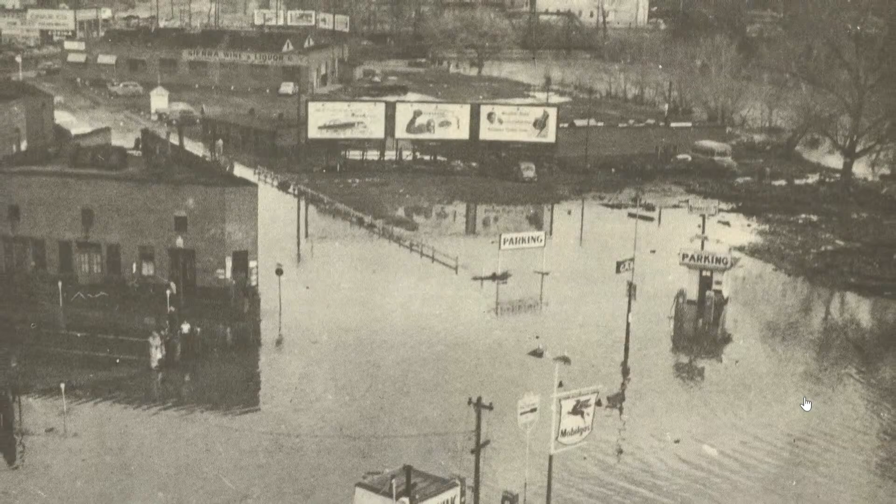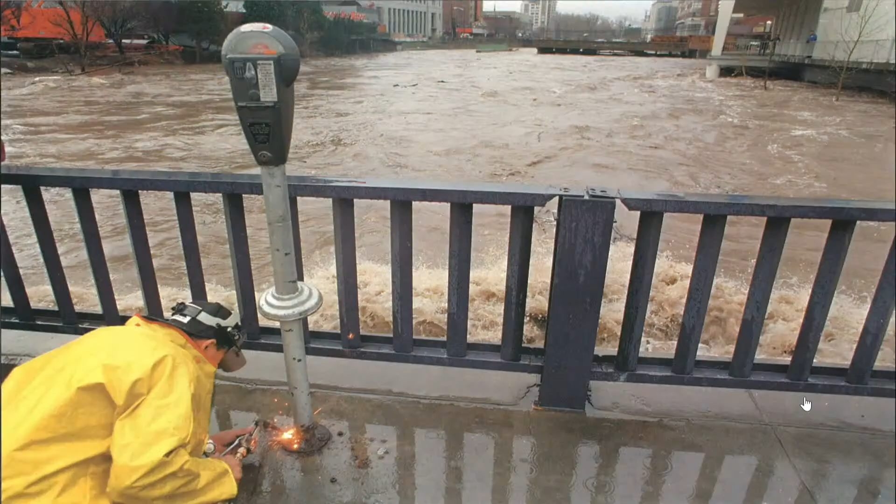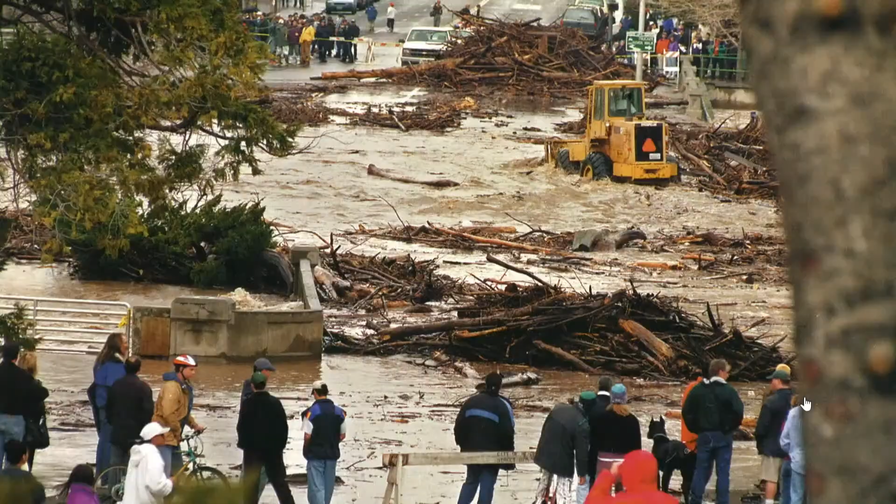The 1997 flood was a very historic and devastating event. We were seeing copious amounts of rain over multiple days, a long duration event with heavy rain, sometimes over a foot of rain in the mountains. There are many iconic pictures of people being stranded on roadways, airplanes having water all the way up to the door. The airport, for example, suffered from water being all over the tarmac, impacting commerce and business. It affected not only the downtown area and did damage there, but it really devastated the Sparks industrial area, as well as the area around the Grand Sierra Resort and the Reno industrial area.

What is interesting about the 2017 flood is that while they were preparing for it, the people I talked to said they were actually afraid it was going to exceed what the 1997 flood was going to do. It was really touch and go.

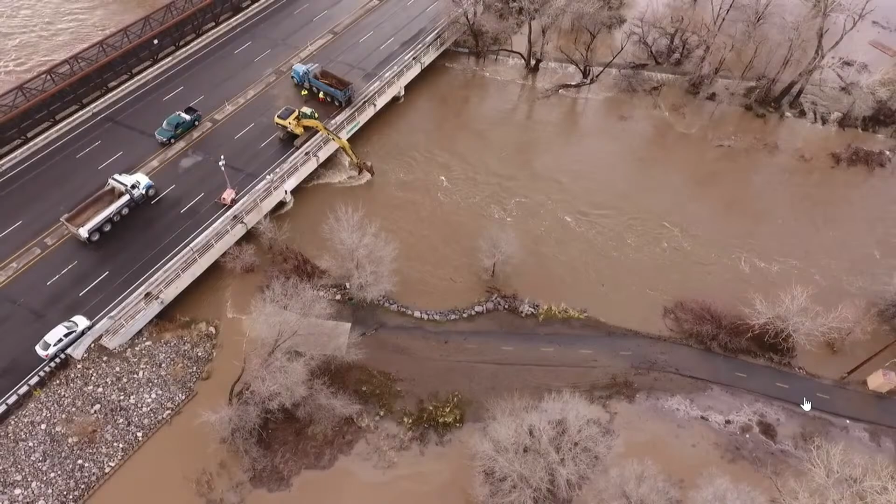Think about the snow when it's drier, it's like a sponge. It can absorb water to a certain point. When you get the snowpack wet enough through a warm rain process, and the temperature also rises to the point that the snow begins to melt, you're now getting two contributing factors towards getting runoff within the snowpack. If it would have been 2 degrees warmer, we could have had a repeat of 1997.

It seems like every few years, we are sitting on the edge of our seats here, looking at atmospheric rivers and wondering if this is going to develop into another 1997 flood.

Flood amnesia is an interesting term. We have not had a really large flood since 1997 - what would that be, 25 years? We have a lot of new people moving to the area who have never even lived through a major flood. So often people forget an event that happened years ago. It's very easy to forget about flooding, especially when we're in a dry period or in drought. We're often in prolonged drought here, and we can be in drought for 2 or 3 years. Just because we're in drought doesn't mean we're not prone to flooding.

Flooding - you need to have that go bag. You need to be ready to go within a 15-minute notification because it could happen to you. We're all in this community together, and I think it's important for us to be one and have a plan and be ready to go if it happens again.

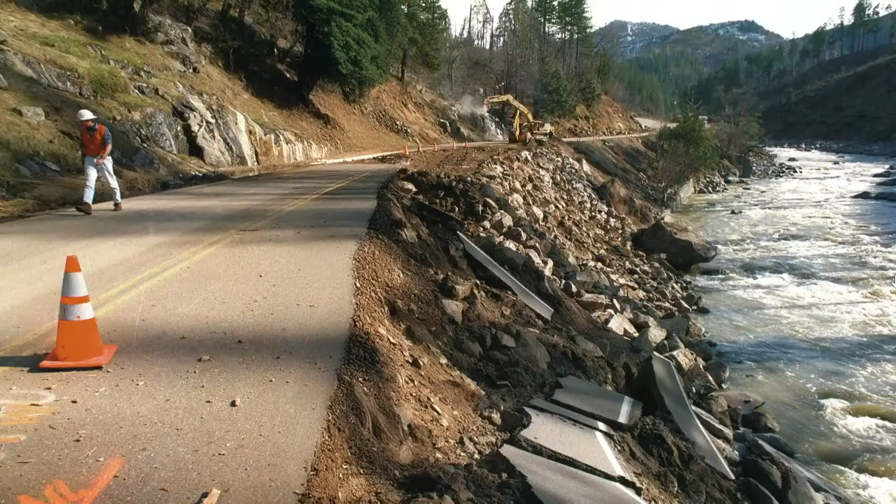People really do underestimate the power of moving water. It only takes about 6 inches of moving water to start to float a car. We have seen many events where once the floodwaters clear, that road is washed away. If you're in or near the water, you can get injured by debris. There's going to be contaminants. Also being around fast, cold water in the winter, if you fall in, you're in a lot of trouble. A flood is life-threatening.

Floods can't be prevented. They're going to happen. What we want to do is try to mitigate some of these damages by building projects that lower the risk and the damages caused by flooding. That is what TRFMA, Truckee River Flood Management Authority, is all about - reducing the risk of flooding, reducing the damages from flooding by building flood project elements such as levees, flood walls, terraces, and other flood features so that the flooding isn't as bad.

Our next step is getting to Vista Narrows. That's where the river kind of takes a little turn, but that's Vista Narrows. The river just narrows down right there, and that's where flooding starts, and so it backs up from there upstream. We're actually widening the low terracing of the river and creating more capacity so the water level does not get as high and it won't flood as much. The Vista Narrows project, it's the grand prize for our whole region to reduce flooding in our area.

People need to know that it can and it will happen. You want to be prepared, and the only way you can be prepared is to know where you stand. Is where you live in a floodplain? Where you work, how prone to flooding is that? Have a to-go bag, because like that '97 flood, when we tell you to evacuate, we need you out of there in a few minutes, and there's no redos. You gotta take what you can take and get out of there.